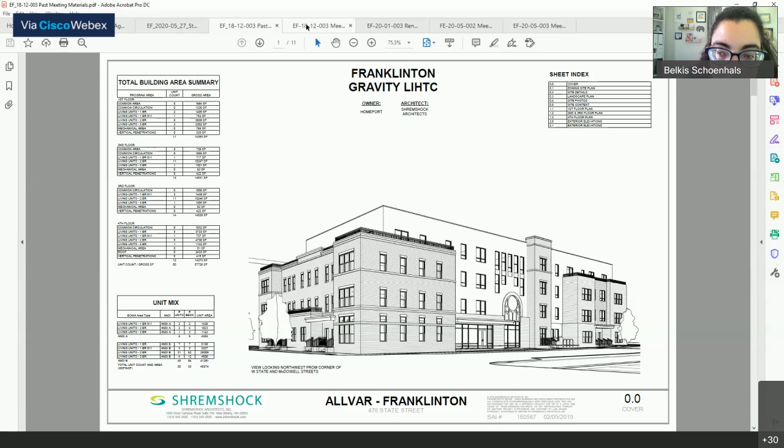So this is a rendering of that same angle, State and McDowell. You'll see the porch-like entrances at the base of staircases and hallways, and the mix of brick and that darker gray material there. If you run your eye along McDowell Street to the right-hand side of the page, that's the covered entrance.

If you could go to page 3, Mark. Yeah, so these are floor plans, so you can see the front of the building versus the back. In the back, you'll see those few parking spaces as well as a little meditation garden.

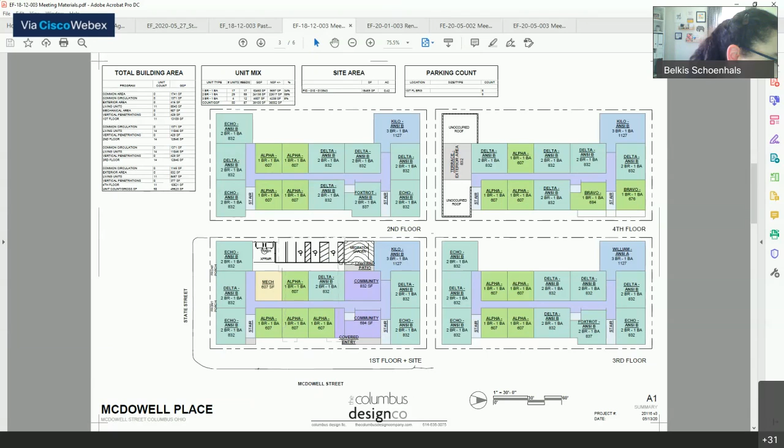If you could go to page 5, Mark. Oh sorry, go back one more. Okay, yeah, so here are the first two elevations. This is the east and south elevation. You'll see that covered main entrance with the glazing and a rendering of that, along with the south elevation. Go forward one more, Mark. And so this has the west and north elevation. If you could flip back to the first page of this PDF, Mark.

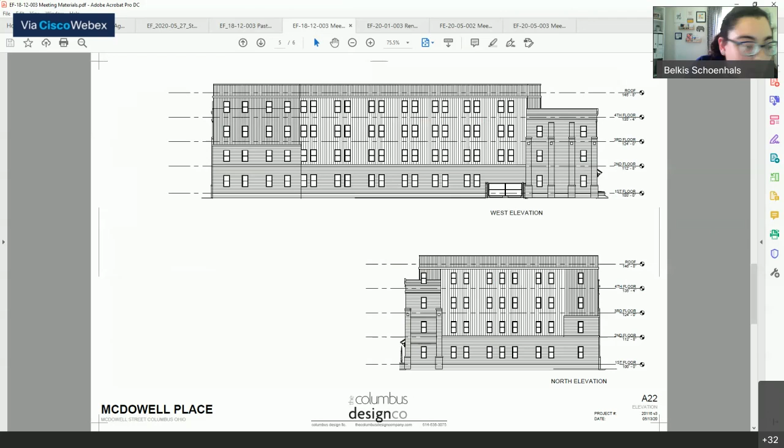So after review, the proposal is consistent with the East Franklinton Creative Community District Plan, and staff does recommend approval. If the board does agree to approve that, the motion would be to approve the elevation in accordance with the existing conditions. Thank you.

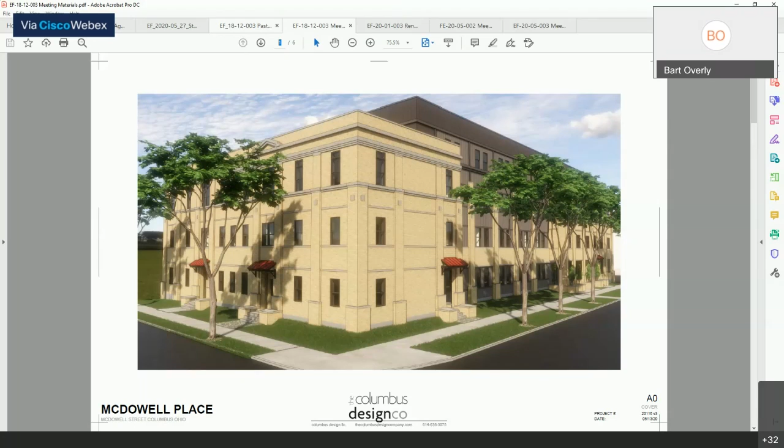Bart, this is Ron. I definitely agree with your comment. If we could switch to page 4, because I was looking at the northern piece, I think that hits to your point exactly. There's double windows in that section and not all single windows. That elevation is much better than the southern portion with all the single windows, in my opinion. Yeah, I agree with that, Ryan.

I like the bit on the third floor. But you have these kind of pediment details that are referencing the entry pieces, which are really part of that 2-story base. So maybe the penthouse or top level pullback piece could be a little lighter in terms of its articulation, and you bring some of those elements that are up on the roof parapet, the roof tier on the south, down to the top of that second story to make a clearer distinction at the top of that level. But I agree, I think there are some better things going on the north piece that could translate to the south piece.

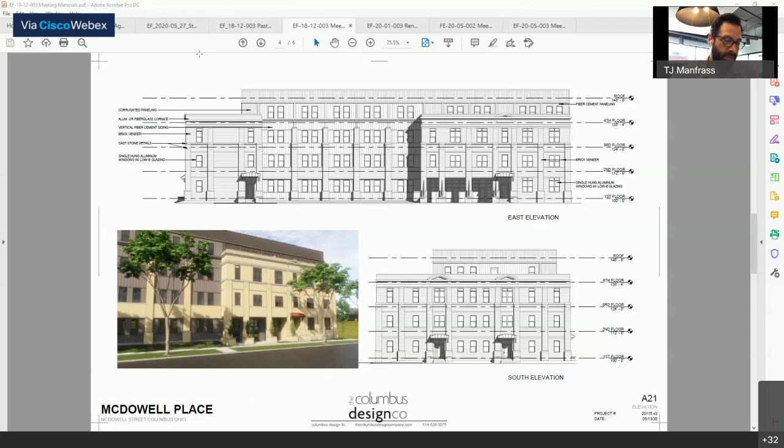Kim, to your point of being a little more grand, would it be a little more grand to continue more brick in between the two to tie them together as a bigger building with an upper addition on it, as opposed to bringing the gray Hardie all the way down to the ground floor on that east elevation?

Again, my point is about that transparency and just the massiveness of that corner. Lots of masonry, it just doesn't feel right. It feels like it's the leftover piece of the building, as opposed to starting with that corner as the star, and everything else building up off of that.

I like the rest of the elevations and stuff, by the way. It's just this corner that I'm reluctant to like right now, because it doesn't seem like it's respecting a key place in East Franklinton, the key corner.

TJ: How do others feel about the corner? I totally agree with everybody on that east corner. That being the corner that faces the new Gravity project, faces the Idea Foundry, faces downtown on the State Street corner, is underwhelming. I think everybody's point is that there's a tremendous amount of massing in the middle, between those six small windows and doors, that is just heavy.

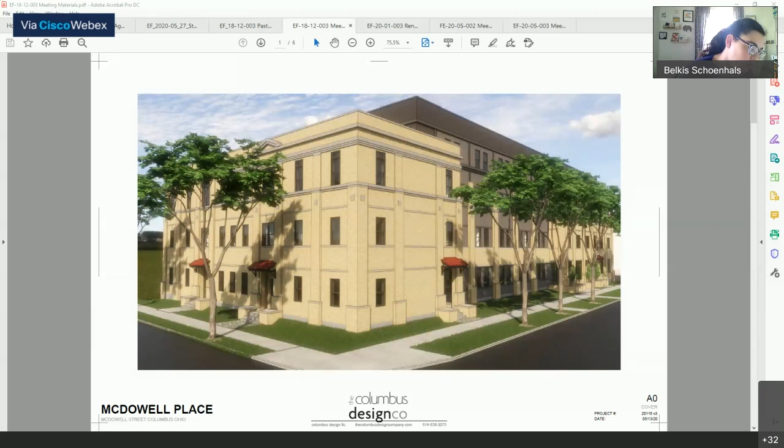Bart, to pile onto that, and I agree with everything you said. I was looking at the floor plan again and thinking about moving the community space to that corner. I know what you mean about putting the entrance on the corner, but couldn't the entrance to the building be just behind this massing? So it's not occupying the corner, but it's just back from the corner, and the community space that you have is basically on the corner.

Yes, you know what, certainly, yeah, that's certainly one of the options, because I like this, I like programming here, the massing of the building, right? And if you try to put an entrance stuck on there, it might not work. I think you could just tuck it behind it and still keep the mass intact, but have the glass and more transparency. It's part of the industrial sleeve that's behind. So you'd get your covered entrance, and the sleeve would just sort of tuck inside and be that entry wall for the community space. Gives you that covered entrance.

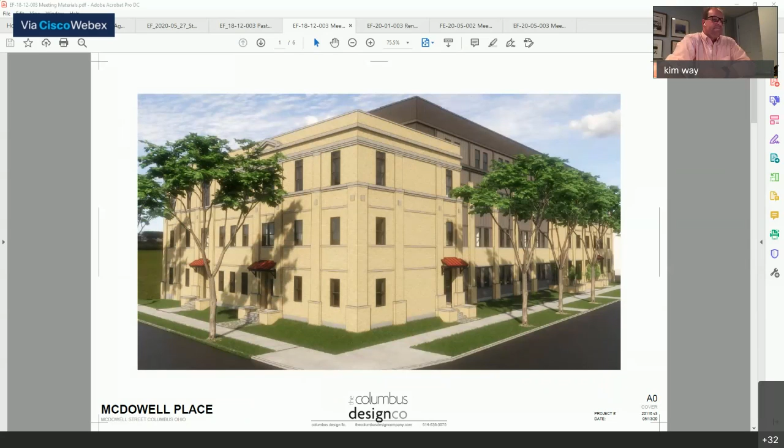Okay, Carrick, is that good for you in terms of direction? Yes, I believe it does. Okay, at this time then I'd entertain a motion.

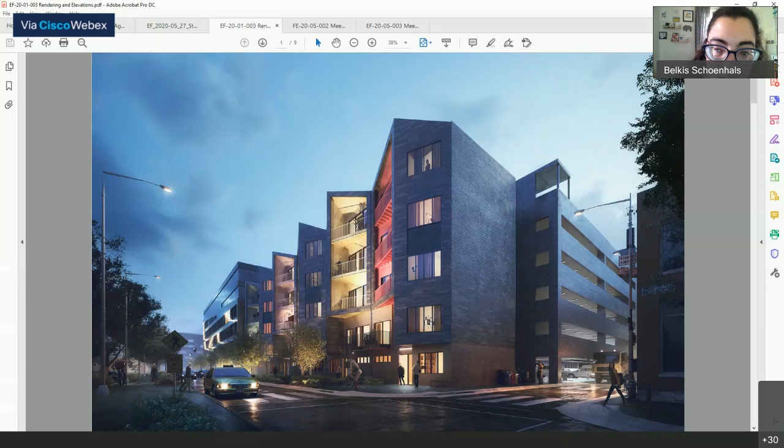And Mark, if you could open that JPEG rendering photo. All right, so here's a rendering, looking north along McDowell Street there, and you'll see the vertical colors running up and down in the massing. Next, could you go to page 2 of the elevations? There we go. Yeah, so here you see the main elevation with the primary materials. You can see that they cut down a lot on the types of materials, so you see the 2 types of paneling and then the 2 types of brick.

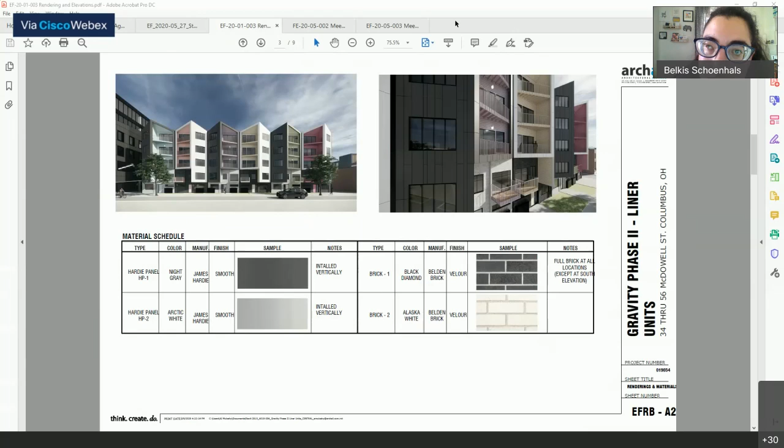And then could you go to the materials page, Mark? It's the one with the colors, it's a separate PDF. Yes, so here's more detail on the materials, and those are the colors there that are going to go in that vertical pattern. So after staff review, the proposal is consistent with the recommendations of the East Franklinton Creative Community District Plan, and staff does recommend approval.

Thank you. Thank you. Board, any questions for staff?

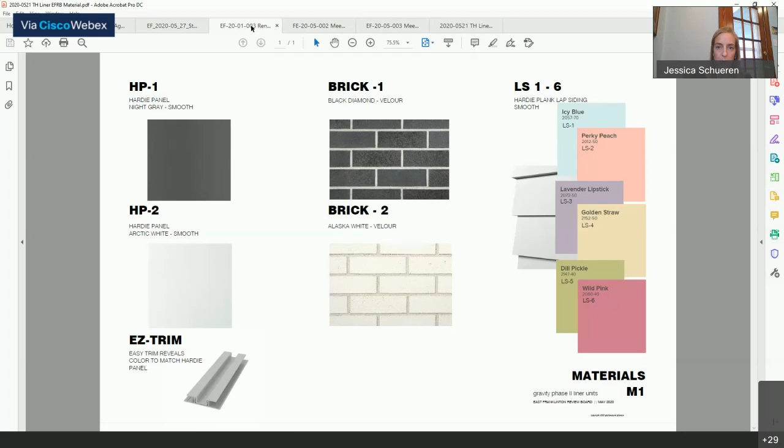So as Belkis mentioned, we have a 5-story residential building. Townhouse apartments are on floors 1 and 2, and flat apartments are on floors 3 through 5. I just want to clarify, the rendering that Belkis showed was actually from before we made material changes coming out of our January EFRB meeting, and the renderings within the application are after the changes. So I will speak to the comments from the January meeting and how we've addressed them. And if we have any questions, we can loop in Heather and get her input if needed.

So a few of the comments were related to materiality. One comment was to uncomplicate the materiality. What we did was switch to Hardie panels, so now we have Hardie panels on the facade of the building and horizontal lap siding on the balcony insets, which are going to be painted varying colors, consistent with last time. We do have full face brick remaining on the first and some second stories, but we eliminated the brick on the stories above and between the windows. We just thought it kept things very busy.

And then we've also painted the aluminum railings light gray instead of the color of the inset balcony lap siding. A lot of that was to kind of simplify the look, but part of it was maintenance as well. And then we reduced the angled building materials so they no longer follow the roof line, and instead they focus on the verticality of the building. I believe that was a comment from Bart and maybe some others. We think it actually looks nice for the building, enhances the building, and is better on the streetscape.

And then, as Belkis mentioned, we created a more welcoming streetscape. We'll have planters outside the apartments to add some softness to the streetscape, but otherwise McDowell Street is within the city's purview for the streetscape. And that is it. Okay, thank you. Any questions for the applicant?

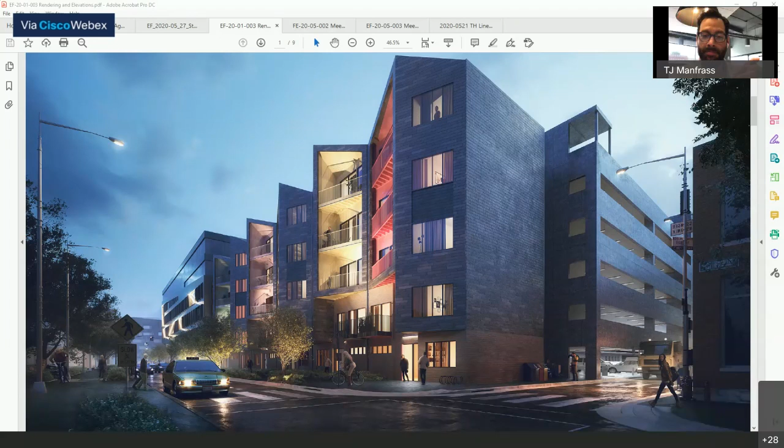Anyone else? I don't necessarily agree with Bart, I like it. Noted, that thick skin. Anyone else? There are no other comments. I'd entertain a motion.

I move to approve as submitted. Motion by Judy Box to approve as submitted. Second by Bart Overly. Thank you.

Any further discussion? If not, Belkis, call the roll please. Dr. Bach, approve. Mr. Egner, approve. Mr. Burgess, approve. Mr. Manfrass... sorry, I was still on mute. Do you approve? Can you hear me? Oh yep, sorry about that. Mr. Overly, approve. Mr. Szymanski, approve. And Mr. Way, approve. Thank you, thank you, thank you. All right, let's move on.

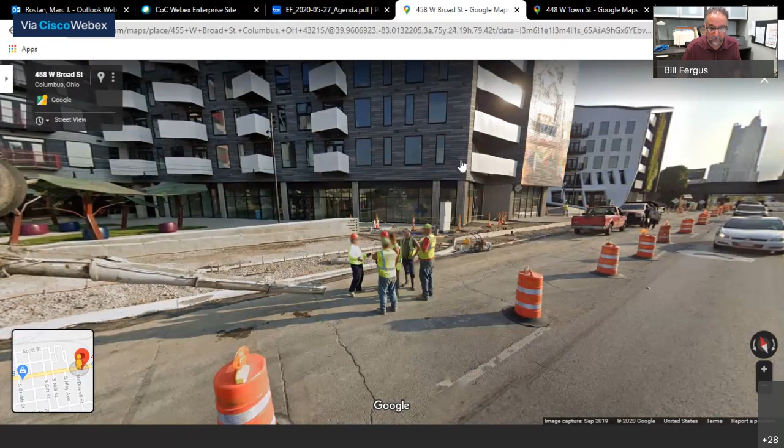Belkis, staff report please. Yes, so 455 West Broad Street is the site for the mixed-use development Gravity 2, which includes several landscape open space areas. The open spaces include a public courtyard connecting West Broad Street to McDowell Street, a public corner plaza at Town Street and McDowell Street, and an interior private courtyard for the co-living building.

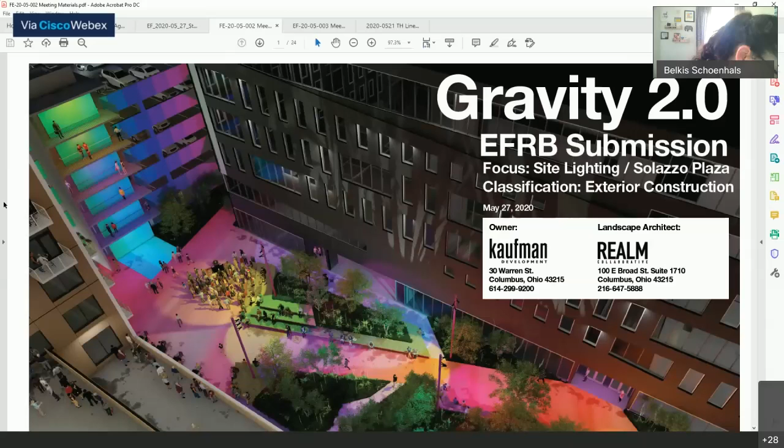Today, the applicant is requesting approval for the Solazzo Plaza landscape plan and the lighting for the public courtyard, co-living building courtyard, and Solazzo Plaza. The submittal includes a site plan, inspiration photos, renderings, and materials. If we could have the materials pulled up. Yes, so if we could go to page 4, I believe.

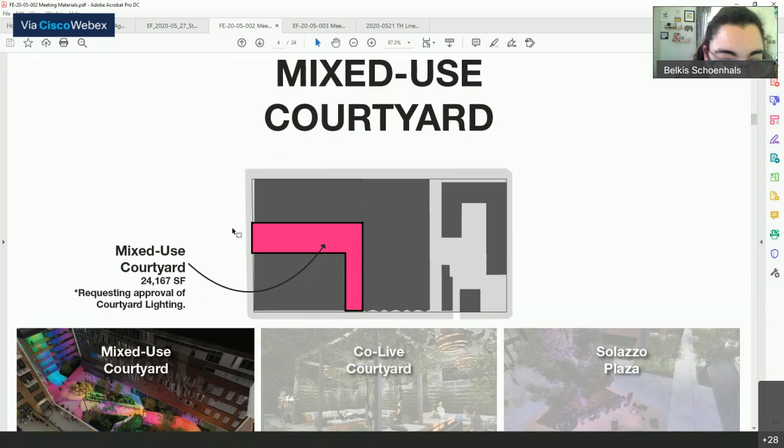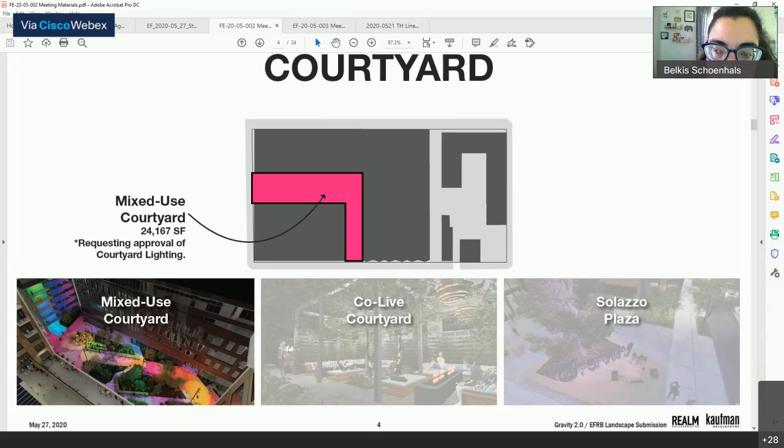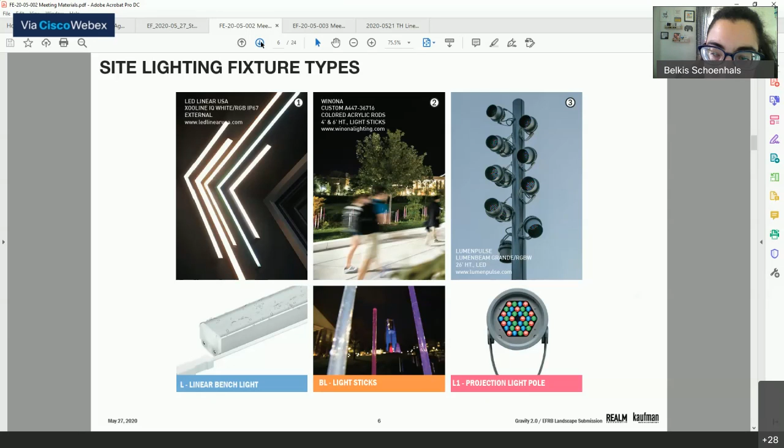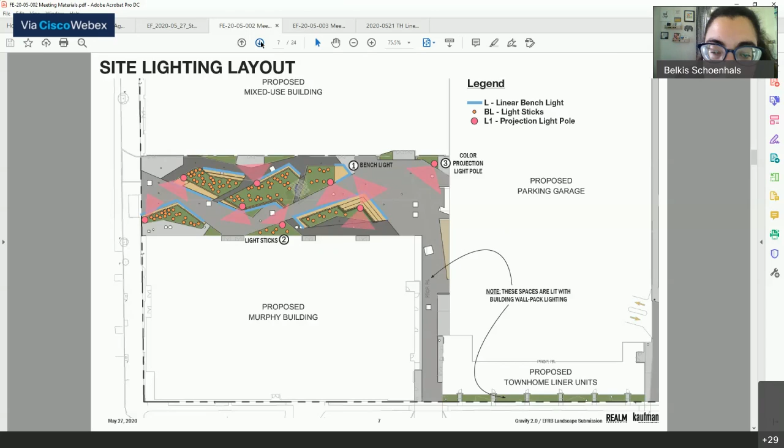And if you could keep going. Okay, so that's the lighting layout. You see there the blue are the bench lighting, the pink are those very tall light poles, and I think this yellow, those will be the light sticks that come from the ground. And then these are renderings here of what they'll look like. Keep going, yeah, there we go.

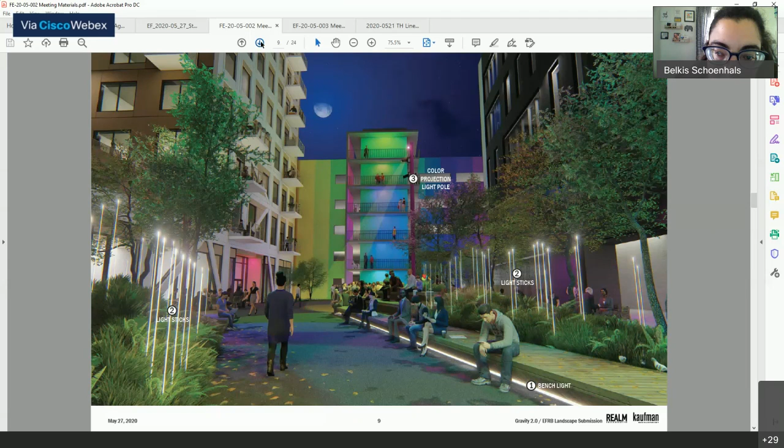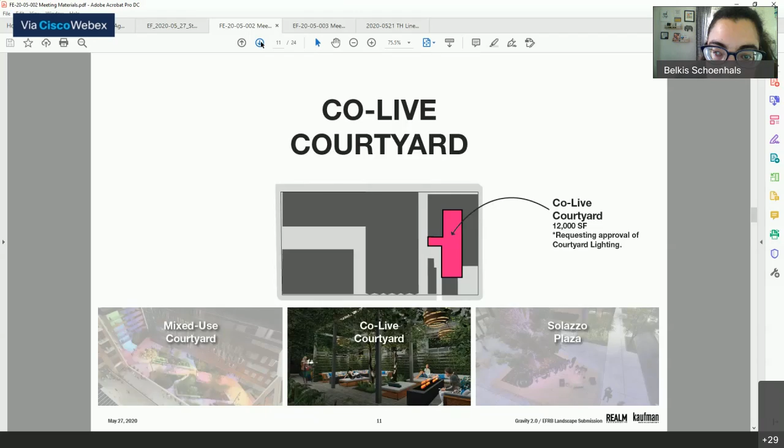So this is for the co-live courtyard. Next you'll see some inspiration photos, and then here are the lighting types for those. So again, you'll have the light sticks, the poles, a chandelier option, and then this is actually a tree uplight. So you'll see that in the plaza space. Keep going.

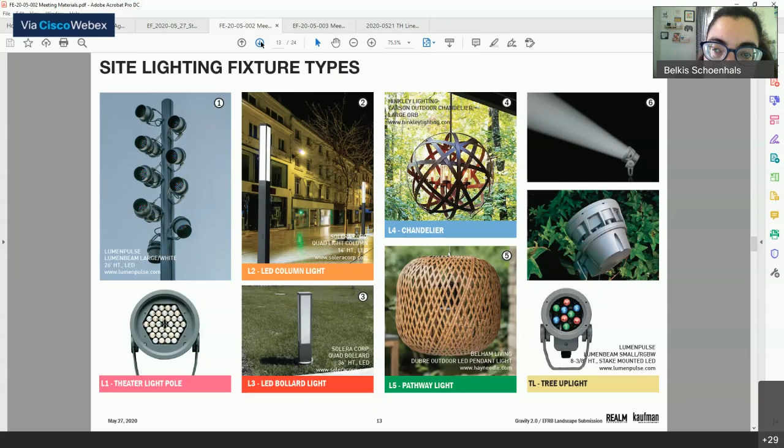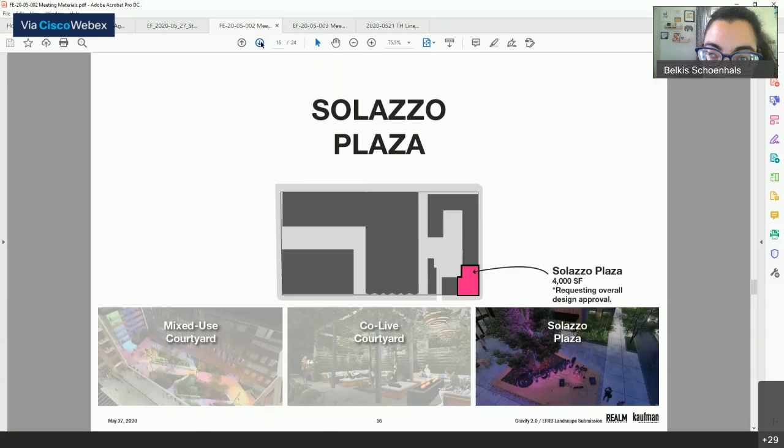And so that's the layout there. So you'll see the co-live courtyard in the interior, and then you'll see the plaza lighting, which has that tree uplight. Keep going. And then that's the rendering for that, for the co-live building. And then this is the Solazzo Plaza. And so that's the plan for that.

I will mention the breathe graphic, and then you'll see another graphic at the corner that has gravity. Those are just conceptual at this point, they're not up for approval. And then you'll see the site lighting type for the plaza there. I believe that's, yep, and then one more rendering of the plaza should be, there we go.

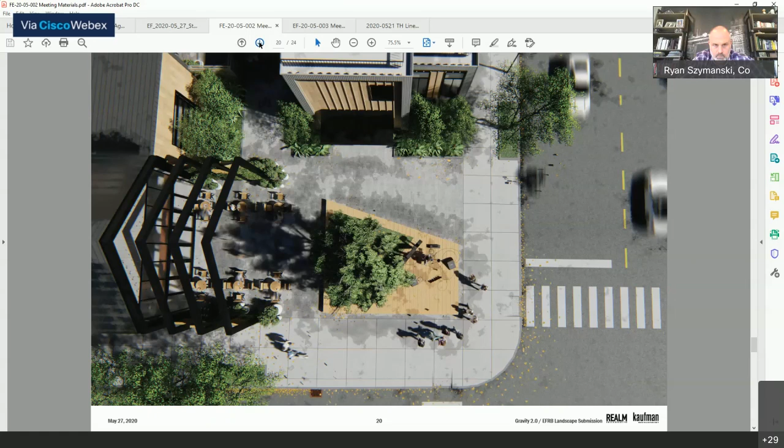Okay, so after this review, the proposal is largely consistent with the recommendations of the East Franklinton Creative Community District Plan. Although the tree uplight is directed upward and shines above the horizontal plane, staff recognizes that the light has minimal spillage beyond the height of the tree as recommended by the plan, and staff recommends approval. If approved, the board will grant the following modifications to the East Franklinton District Development Standards, and that's to permit a light fixture to exceed the 18-foot height limit by 8 feet.

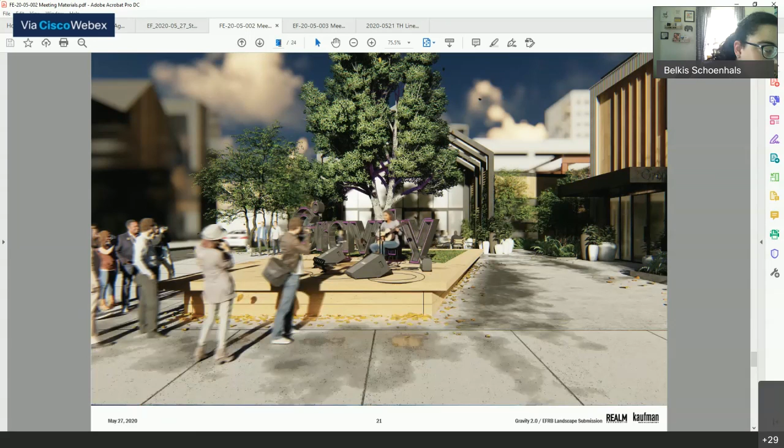Thank you. Okay, thank you. Any questions for staff?

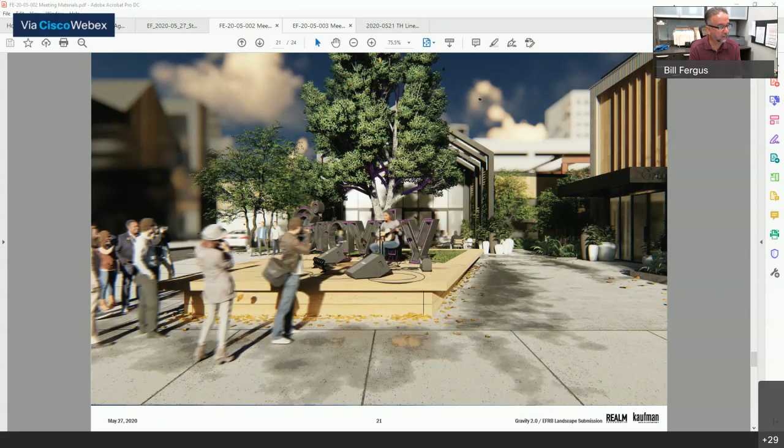Okay, if not, appearing on behalf of Gravity 2 for this application are Devin Carruthers, raise your hand, and Carmine Russo Jr. Gentlemen, do you swear or affirm that the testimony you're about to give is true and accurate to the best of your knowledge and belief? Carmine? Yes, I do. And Devin? Yes, if you can hear me. We can hear you. All right, so the floor is yours, gentlemen.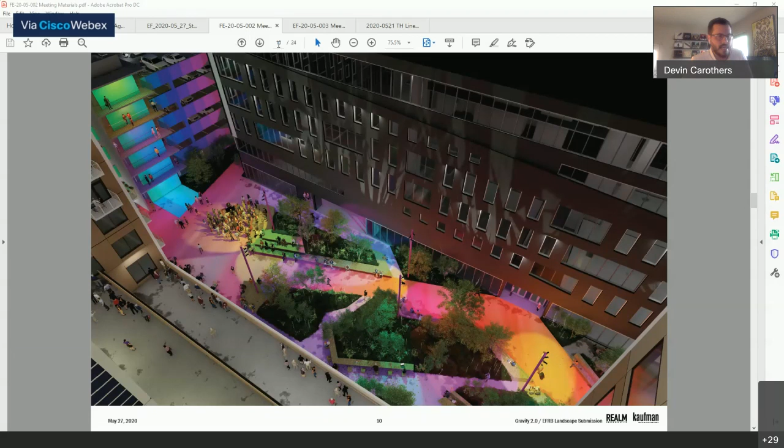Great, thank you all. Belkis, thank you for that intro, you covered a lot of it. So I'll be pretty brief, and then I'll let Carmine walk through some of the plans in a little more detail. So a lot of what we have today was already shown in October with the landscape approval in terms of the lighting. We're just coming back for actual official approval on that. Solazzo is that corner of State and McDowell that everyone talked about in the first application about being so prominent. It was actually in the plans in October, but we didn't show it as part of the approval.

And then the one other thing I wanted to clarify that I actually missed in the staff report, Carmine, you can correct me if I'm wrong when you jump on, but I believe that the light poles are actually at 26 feet. So I think it's an 8-foot variance that we're requesting. It's the same exact poles that we have in terms of height across the street at phase 1, which you saw on the Google Maps image when Belkis pulled that up at the beginning.

That is all I have. So Carmine, if you want to jump in, and then I'll be around for any questions. Yeah, sure. I mean, I'll be brief as well.

When we were there in October and received approval on the site landscape design, much of the renderings you see for both courtyard spaces were the same renderings you saw then. All we're really doing is showing you the final lighting fixtures. The projection lights are 26 feet tall. They'll have color changing capabilities in the mixed-use courtyard area, while in the co-live courtyard area they'll just be white LEDs. The tree up lights in the seating platform at the Solazzo will also have color changing capabilities, using RGB technology with controls to change them throughout the seasons and year.

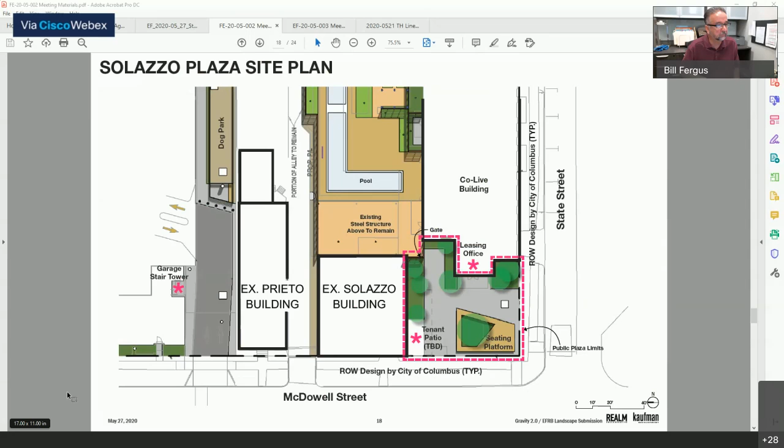Any questions for the applicant? I have a question about Solazzo Plaza. This is Bart Overly. Is that seating platform — you might have mentioned this — going to have that big gravity sign on it?

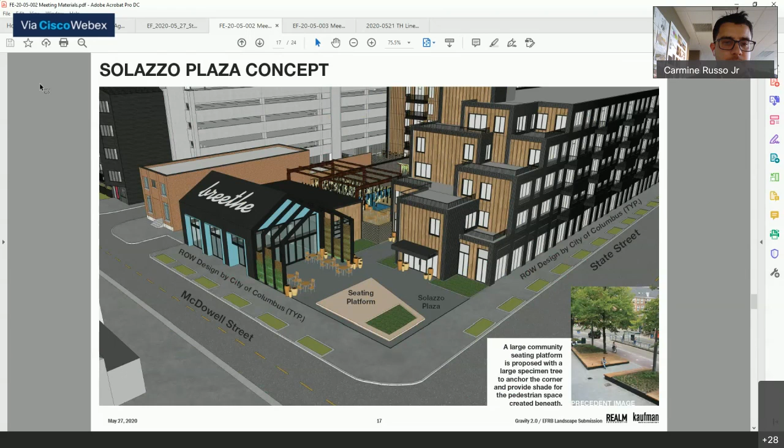Devin, maybe you could take that. Mark, do you mind flipping to page 22? To answer your question, Bart, the intent is that — although we're not asking for graphic approval right now — that is the intent, but it's not technically part of this approval, as I understand it, Belkis. That's correct. Got it. Thanks.

This is Kim Way. It does show lights related to the sign. Are we approving those lights and not the sign, or do the lights go with the sign? No, the lights go with the sign, and they'll be approved at a later graphic submission. The lights we are asking for approval on are the tree up lights within the landscape bed, and those are not associated with the signs.

If you can see the kind of magenta on the tree itself, that's what would be getting approved today. The inner tube light that looks like it's inside the gravity sign is not part of today's approval. Does that make sense, Kim? Yeah, I just saw the lights there and wondered if there were more lights, but those weren't presented, so I assume they're part of the sign.

I did have one other question about the pole lights — not the pole lights, the really thin ones. The stick lights? Yeah, the light sticks. What's the durability of those?

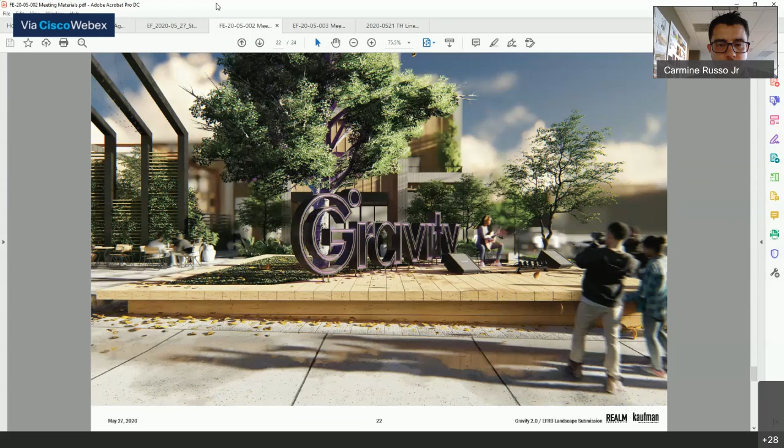It will have its own footing. Right now we're working through with the site contractor on how we might create a more robust foundation that connects a few of them and gangs them together, because there was a little concern that they could be hit. So we're trying to work through a good detail on how they can stay in the ground with a good foundation.

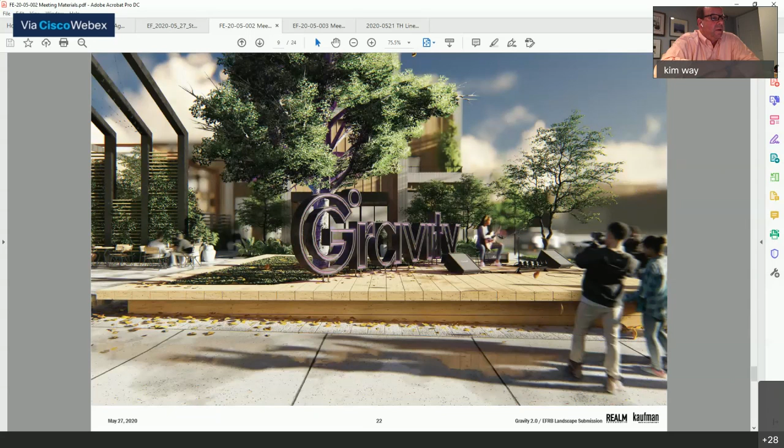I'm looking at page 9, and they're very close to the walk. I could see somebody just walking by and whacking them. But are they fairly durable that they'll take some abuse? That's what we're working through.

They're pretty thick acrylic glass. I don't know exactly how thick the glass itself is, but it's meant to be in an outdoor exterior environment, an urban space. It's based off something we found that was installed at a university in Michigan that has been in for a few years, so we're fairly confident it'll withstand the urban environment.

Anyone else? Last thing we want is to see those broken, Kim.

Any further questions? If not, I will entertain a motion from the floor.

Motion to approve by Kim Way. Seconded by TJ. Okay, the application has been moved, approved, and seconded. Any further discussion? If not, Belkis, call the roll, please.

Dr. Bach, approve. Mr. Egner, approve. Mr. Fergus, approve. Mr. Manfred, approved. Mr. Overly, approve. Mr. Szymanski, approve. And Mr. Way, approve.

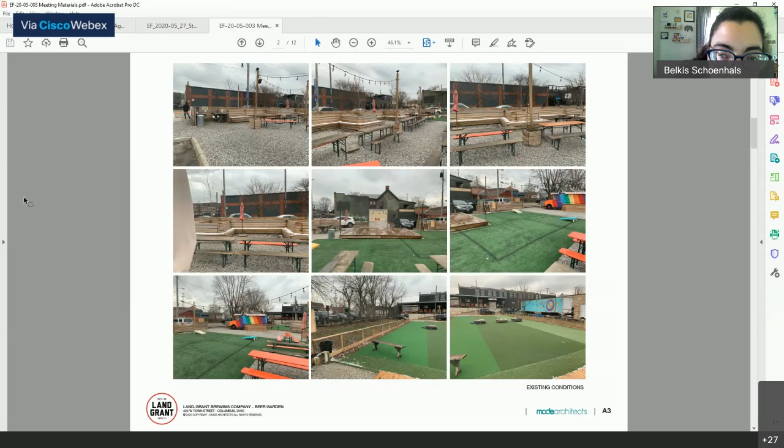If we could look at the materials, page 3 - here's what the site looks like now. If we could flip to page 5 - here's the site plan. It might be a little hard to see, but yeah, there we go.

You'll see the proposed event stage on that northern piece, the extension, with the shipping container next to it. If you draw your eye to the right and down, you'll see the portable toilets. In the center, you'll see the new maple trees being proposed. If you draw your eye to the left a bit, you'll see the proposed video wall, which will be on a raised platform. Amongst the site and around, you'll see a new swing gate and fencing.

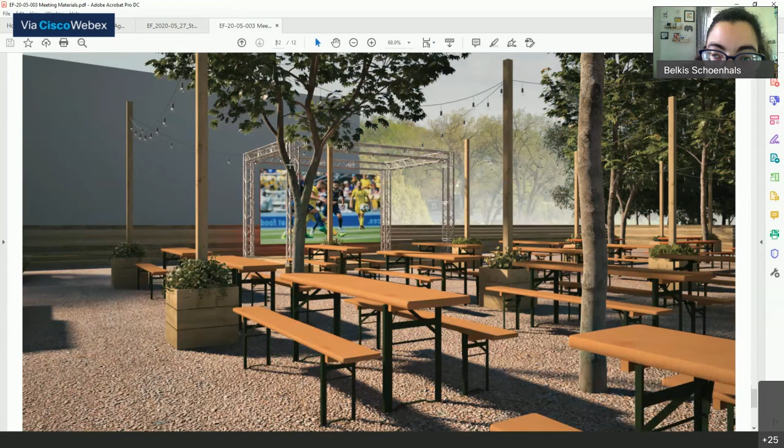Here are some renderings of the event stage and the shipping container. If you go one more - and then there's the video wall. And then, were there some inspiration photos, Mark, that we could go to?

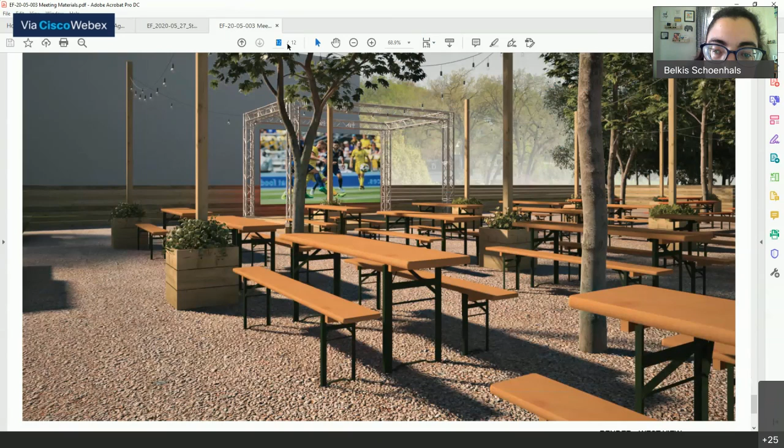Here. And then there's one more page. Great. Yeah, so there's the inspiration for that stage piece especially.

So after staff review, this proposal is not consistent with the recommendations of the East Franklinton Creative Community District Plan. Staff previously supported the beer garden extension at 441 and 443 West Chapel Street based on the applicant's statement that it would be limited to lawn games or similar.

The basis of support was that no additional guests would be accommodated in the beer garden extension, and therefore no additional parking would be needed. The parking reduction requested for the new current site plan proposal is not appropriate based on the intensity of the use and the scale of the reduction requested.

Additionally, the proposed site programming is not consistent with the existing fabric and scale of the commercial and residential development in the surrounding neighborhood. As such, staff recommends disapproval based on the following plan recommendations: one, new construction should be integrated with the existing fabric and scale of development in surrounding neighborhoods, and two, that parking reductions may be appropriate for higher density mixed use projects. Shared parking arrangements may be appropriate.

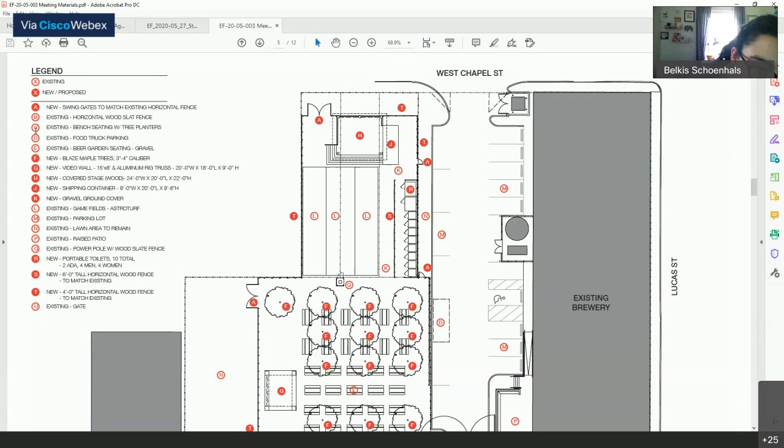Okay, so currently on the site, there is a raised platform on the southern part of the site where the proposed video wall is. So there's a raised platform there, which I believe has been used for maybe small concerts or something. But what's different about this application is that they're now proposing to put in a large, more formalized video wall and then have a larger stage on the northern portion of the site. And so when they came last year—

the impression for the expansion of the beer garden into that 441 and 443 West Chapel Street was just to provide some lawn games, and that no additional seating would be there, and no additional patrons would be standing in that area. And what we're worried about is intensity of use. So if this were to be approved, the parking reduction, which currently is—

so there's currently a parking reduction of 264 spaces. And so with formalizing this proposed site to have a large event stage with portable toilets and a video wall, we're worried that the intensity of the use is going to be too large, given the scale of the rest of the neighborhood. There's a residential home just to the west of the event stage, and given the surrounding area, we're worried it'd be too intense of a use.

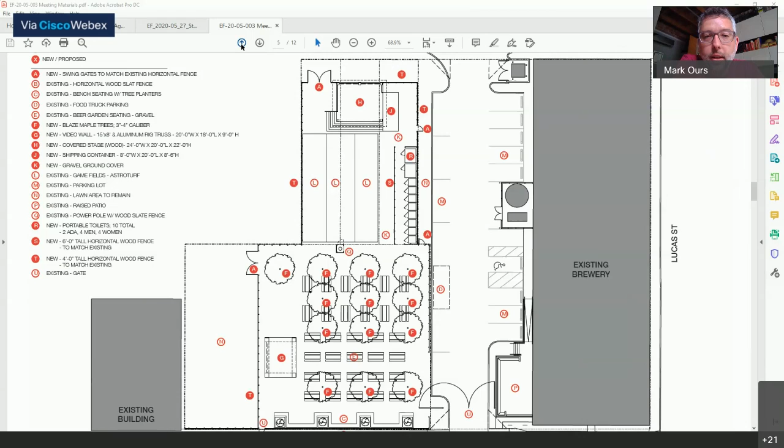Great, thank you, I'm going to go first if I could. I'm just going to give everybody some context. I think the conversation that you were having amongst yourselves, I think it's first important that we talk about timeline. This thing was originally approved as a temporary patio, and that is the intent, is for it to remain temporary. However, at this time, the landlord has offered Land Grant a 10-year lease term.

Sorry, can everybody hear me? I'm getting quite a bit of an echo. That would help. No, that's better, sorry. So what we're asking for today is to change what is currently a 3-year approval to a 10-year approval. And I think to Commissioner TJ's point about the economic investment, Land Grant has looked at whether or not they can make these improvements to the premises and get their money back. And if the lease were to be terminated or the COA were to expire and the land then be ready for development, that would be an acceptable outcome.

So I think the first point to talk about would be whether or not the commission, the board, would be open to the idea of a slightly longer short-term approval. We still recognize that this land is prime for development, and I think the recent approvals on the Scioto Peninsula show to everyone that there is about to be a lot of change, particularly to this east end of Franklinton. And I think it's only a matter of time before the current landowners find the appropriate buyer. It is possible that Land Grant offers to buy this property. They've been trying to do that, but it hasn't come to fruition as of yet. So I think the first question is the timeline.

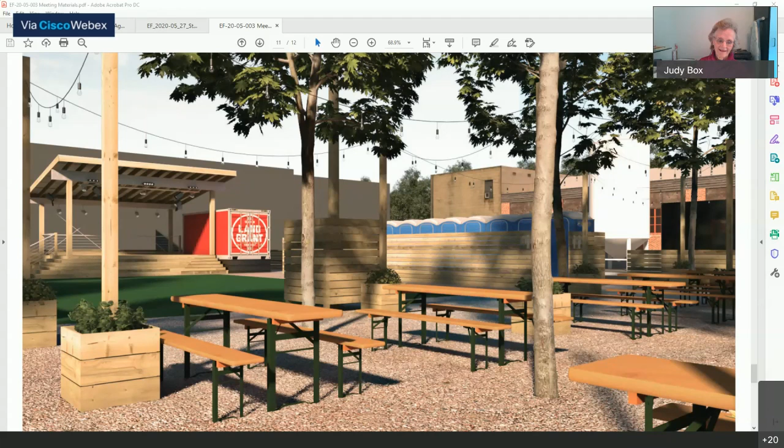Once a decade, people can live with that.

I still stick to it would be nice to get some assurance from more than just a handful of people that this isn't turning into more of a music venue, since we don't have control over how often that happens. There's the noise level and the time permitted, but I keep remembering an elderly person who lives down the street and has trouble finding a parking space.

Jim, do you want to take that one? She is your neighbor. Sure, I'd love to. Thanks for letting me in.

I love this idea. I think it needs to be done permanently, both the use and the site programming. Land Grant has been a spectacular neighbor. I live and own my house 500 feet away from this site, and I know the woman you're talking about. Her name is Mitzi, she's my next door neighbor, and she loves Land Grant too. If she were here, I'm sure she would agree with me.

Her issue was more about the parking on our street and neighbors being concerned about having trouble parking. But as it happened, you supported a parking permit, and it's been working out beautifully. Nobody on our street has had a parking problem since. For the tiny few areas that are actually residential, and I am the closest owner to the site at about 500 feet away, we have no trouble adding more people or vehicles to the neighborhood.

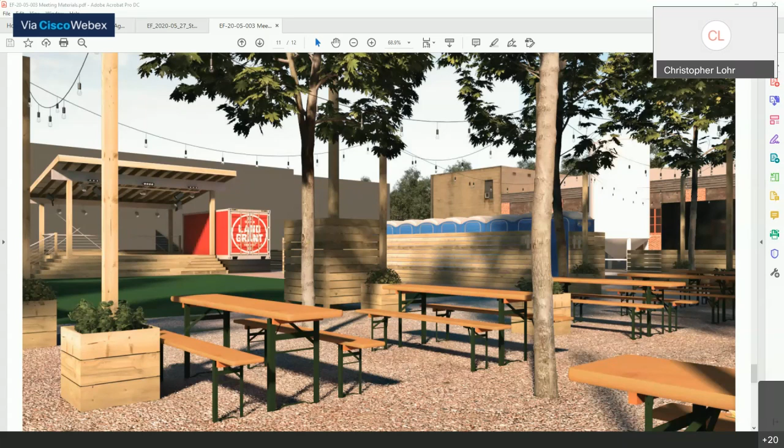Okay, thanks. This is TJ. I think the question is for Adam—does he want us to vote on this as is, knowing this will probably not pass without the information on materials and structures, or are we in favor of him resubmitting the current site plan next month for permanent usage and occupancy? Then if he wants to submit after that, or at the same time, for changing the layout and site plan, we could take a look at materials, layout, and permanent structures. It sounds like we're fairly in support, but don't have the information currently.

So, Adam, what's your take? That's kind of where I was going, TJ. I think we need to make sure we've given the applicant enough direction on what we're looking for in a permanent plan, so they can do a resubmittal that will satisfy the board going forward. So board, let me start with the applicant—do you feel like we've given you enough information that you could submit a plan that would satisfy some of the concerns regarding structures and materials?

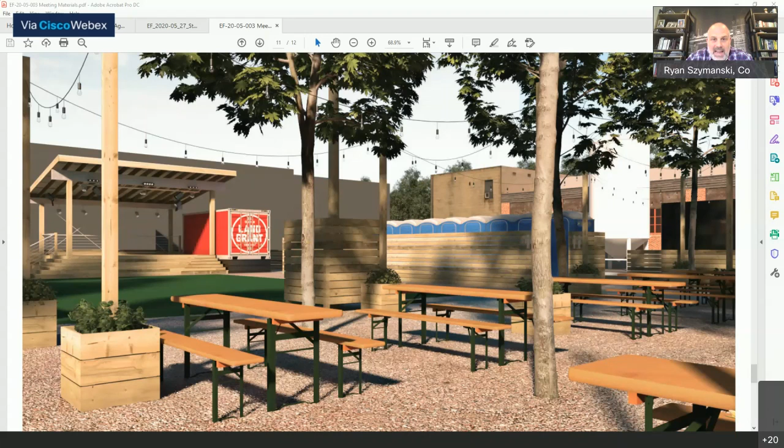That makes sense? Yes. I don't know if Ryan was going to say something. I know Adam, and this is Belkis, tell me if I'm not allowed to. I mean, Adam, I understand, because I'm in development, and not having public meetings for 2 or 3 months, definitely you were probably ready earlier. I understand that that's a delay. I understand you may be under constraints, wanting to sign a long term lease, and having some level of commitment that we can get there.

So honestly, is waiting a month problematic because of those things? I think the general consensus, at least for me and what I'm sensing from the group, is we're generally in favor of some permanent solution. We like that. I don't think there's huge pushback, but we want more information, because at least for me, I was caught off guard that this was a permanent application. So trying to understand your time constraints might help answer what we do.

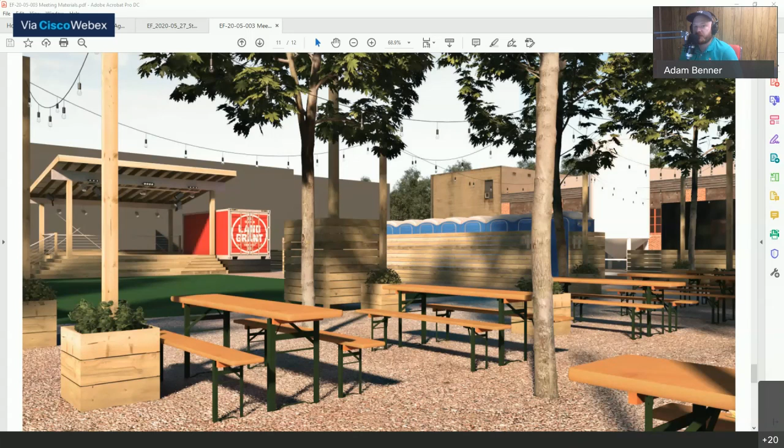Yeah, that's a good point. And the way Belkis clarified it helps. It sounds like the second option would give us confidence to start marching forward, investing in having Mark work on a lot more detailed drawings. I mean, this was just put together, not with Mark and Ryan, just on this kind of view. So with the idea that the board would be looking for this in these drawings, these are our current look with some additional permanence. With that guidance, we can start working on that, and I can continue finalizing our long-term plans. I think that timing makes a lot of sense for us. So that number 2 option makes the most sense to me.

This is TJ again. I think we are in support of a permanent solution, and I think if this was a conceptual review, we would all be in approval of the conceptual review. So if you just want us to not vote on it and come back, I mean, if we want to discuss thoughts on permanence, I think everything looks good. I have concerns about the Porta Johns and coverage on those, but we're talking minimal things that I think if you guys looked into a little longer and designed it with a little more depth, would shake themselves out.

So I think you've got a pretty firm commitment from us. It sounds like we are behind moving forward with this as a permanent solution. Does anybody on the board disagree with what TJ just had to say? I don't, I agree with that. I would be happy to approve the site plan personally and deal with details later. We kind of know the pieces, parts of it. They just need to do a little work on them, and I agree with the applicant that it would help to give them some formal confidence that they can move forward.

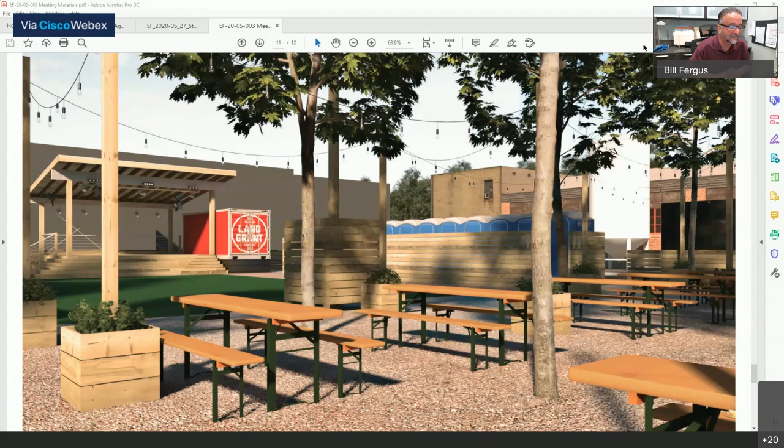This is Belkis. So it sounds like the motion, given what I'm hearing, would be to table the application so they can come back next time. That's correct, that's suggested motion based on what everyone said. All right, I will entertain that motion from anyone who wants to make it. So moved.

Second, Kim Way. All right, any further discussion? I think we beat this horse to death. Matt Egner, do you have something to say? I was just going to make a motion to table it. The applicant has a sense that we're looking to approve it, and we just need to give them time to come up with their real plan here with materials. But okay, let's take the vote and then I'll talk a little more.

Belkis, call the roll, please. Dr. Bach? Approve. Mr. Egner? Mr. Burgett? Approved. Mr. Overly? Approve. Mr. Szymanski? Approve. And Mr. Way? Approve.

Okay, thank you. And to the applicant, I agree with the rest of the board that at some conceptual level we're all in favor of a permanent solution here. We encourage you to return both with an application to make the temporary arrangement permanent and with a conceptual design as to what you would like to do going forward. I guess I'm confused because Kim's comment was about needing more information on the actual use, and some comments were on the materials.